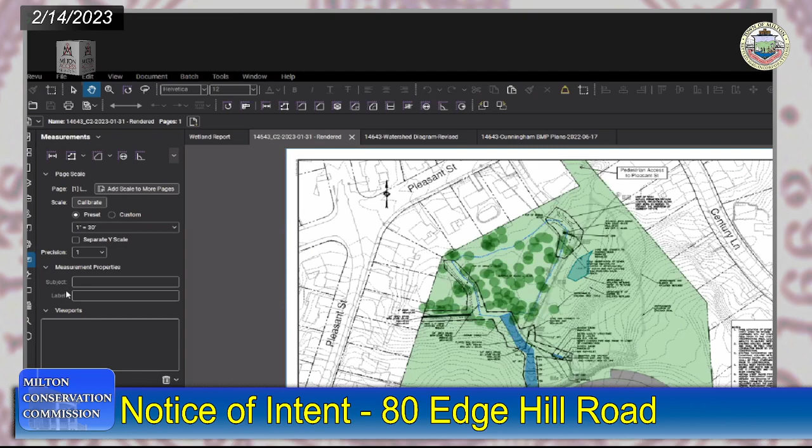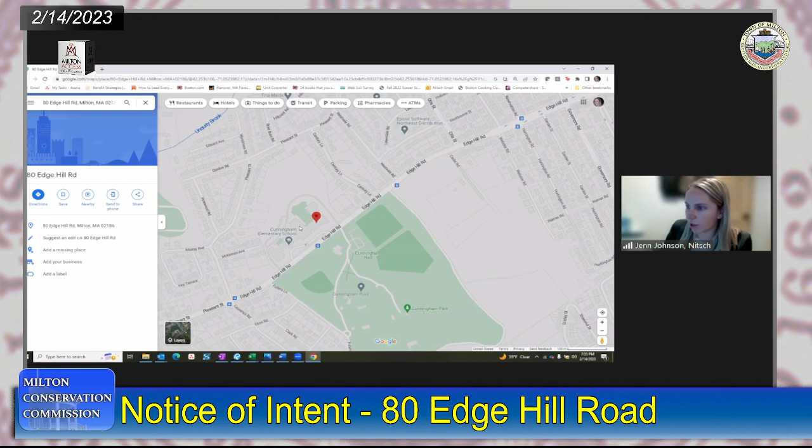All right, no problem. Let me get situated here. Are you able to see my screen? It is a rendered plan. Yeah, there it is. You're on. All right, great. Actually, maybe Marina was going to give the quick overview. I just want to provide you with a better locus map here, for those who haven't visited this part of town. Hi, Jenn. I'm here. I just want to let you know. All right, go ahead. Why don't you jump in and give the intro? I was just pulling up the aerial on screen, and then I'll take over when you're done.

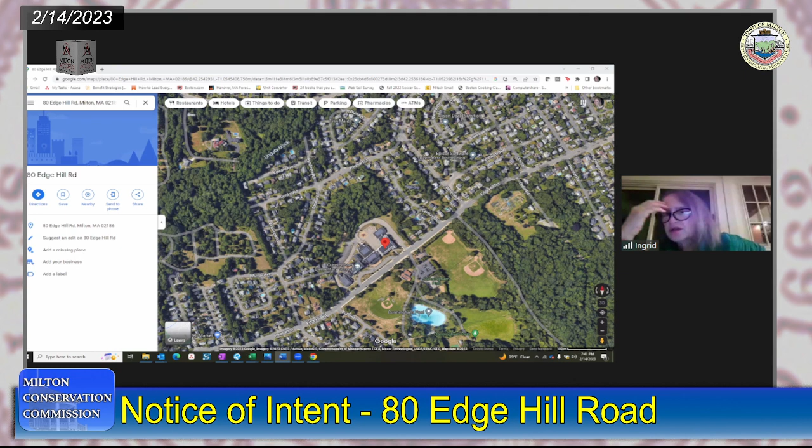Okay. Thank you. John, you and I were thinking along the exact same lines. I just scribbled down a question here in my notes: just solids, or bacteria as well? So you've answered the question regarding the solids, and you started to answer the question regarding bacteria. But I just want to take it one step further.

So there's E. coli, but any other organisms in terms of bacterial growth or contamination? For example, runoff due to fertilizers can cause blooms of other microorganisms as well. So I'm wondering if you can address that aspect of it. Sure. Do you mind if I jump into a little bit more detail about how it's designed, and then we can talk about those pollutant removal processes? Yep.

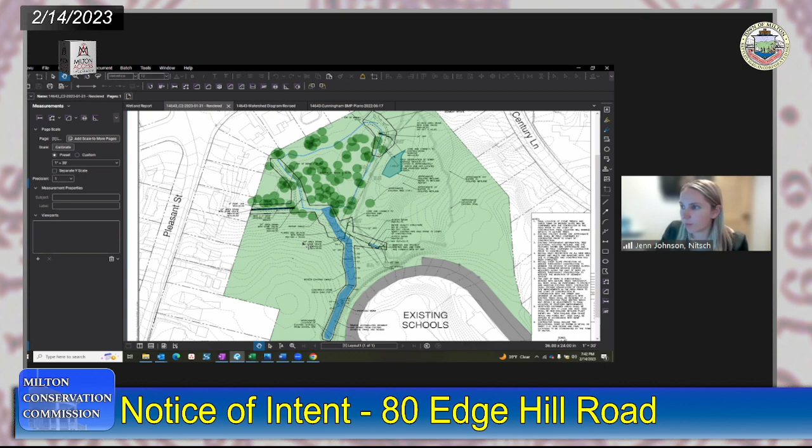So coming back from this image here, I'm going to show a plan that zooms into this wooded area where we're proposing the stormwater basin. And just to orient you here, we've got the school property and the driveway that wraps around the back, Pleasant Street up on the north side, and then Century Lane over here.

The primary intent of this project is to utilize this existing woodland depression. It's already a low point located, as Marina said, right alongside the sewer and drain pipes. So it provides easy access for us to divert the lower flows associated with that closed drainage system. So the plan right now, as shown here, is to create a diversion manhole along the existing system, send it to a water quality structure, which is going to be our first line of defense.

It'll remove trash and larger sediments, things like that, before we even divert into this lower swale here that is going to flow into the low point that will remain a woodland condition, but will be able to absorb stormwater runoff. Is that structure underground or is it above ground? That's right. The structure is below ground. And there's 2 access manholes at the surface that will be able to be cleaned out.

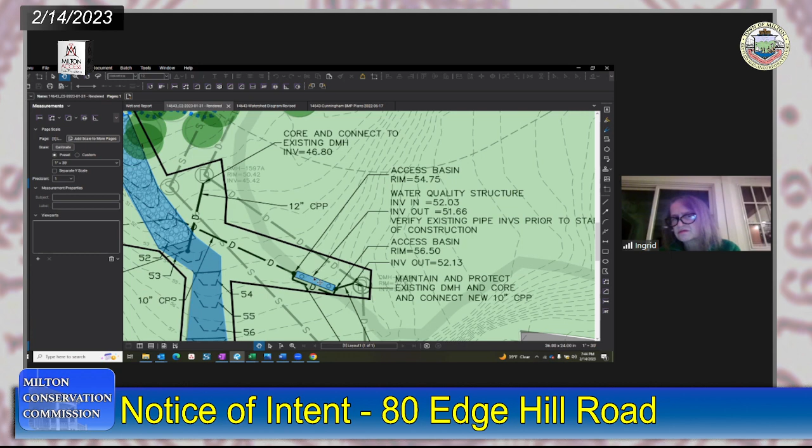So those are removal of gross contaminants, or whatever. Do you know what the size exclusion is of that step? The size of the sediment to be removed? Size exclusion. And what is the filtration like? It's not really intended to be a filtration system. I can even show you a detail of it if you really want. I love getting into the details. So I'm happy to show you.

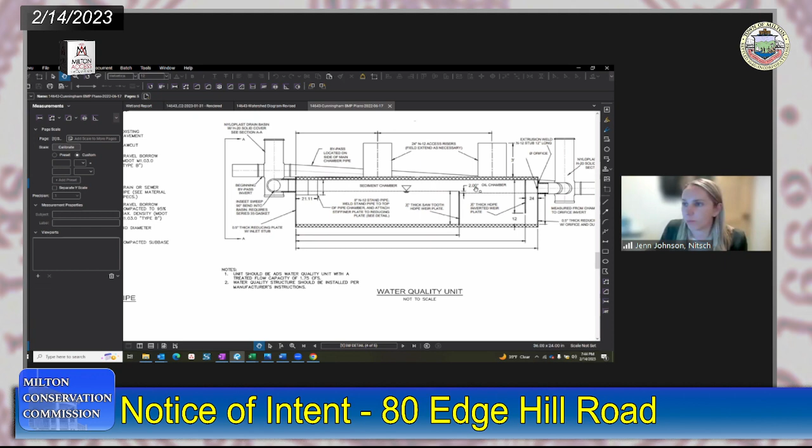It's kind of like a glorified sediment forebay, right? But we put it below grade because there are trails back there, so we thought it might be better to have this structure below grade. So it's really just a sedimentation chamber that also will allow oils to float to the top before you get to that second step of treatment. So it's not an actual size exclusion. It's just simply sedimentation. I got it. That's right. Not like a hydrodynamic separator.

Exactly. And so then water, which is primarily from the closed drainage system, is going to take this treatment train. It will go down through this riprap swale and down into the infiltration basin. And the way that this plan is set up is that the town did go through and take GPS shots of the points where trees are located, primarily within the limit of work. So there are trees obviously all over this green space. So I just wanted to point that out.

But we did want to try to design the earth moving that is required to minimize impact to trees as much as possible. So the way that this basin will be created is by constructing about a 2-foot berm located on either end that closes off that existing depression and allows water to pond within this woodland area. I'm sorry, within the what area? Within this woodland depression here. Okay. The soils actually are quite favorable within this low spot for infiltration. And so that will be the primary way that water is cleansed, is to be recharged back into groundwater.

And then overflow and larger storm events will be collected through a beehive grate, which is those large circular grates that have a nice trash rack on top. And then it will connect right back to the drainage system that runs along the pathway here. So when you say ponding, and I know a lot of the calculations were done with a 1/2 inch of water as the model, but I also saw that you went through 2, 25, 50, 100-year storms. Do you expect water to be in this area that you've surrounded in blue as standing water?

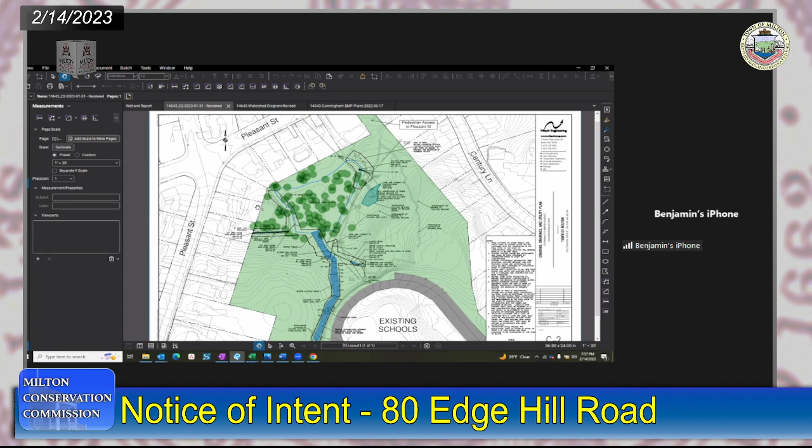And it's not covered by the berm that looks like it's proposed. It cuts off right where most of the flooding into the backyards actually occurs. Oh no, up a little bit further with your cursor. Yep. So that house right where you are, and then up off, exactly. And the one up off to the right will also experience some of the water during more extreme situations.

But do you agree, though, that the berm will help protect your property, as we're looking at to the right? So I've never spent any time off to the left, beyond where my property is. I'm sorry, not making sense. On the other side of the berm from where my property is. But anytime I've gone out in the back of the house after heavy rainfall, that whole area off to the right-hand side of the berm collects water, and that water is also moving into our backyard. So I don't think that berm is actually going to protect us much.

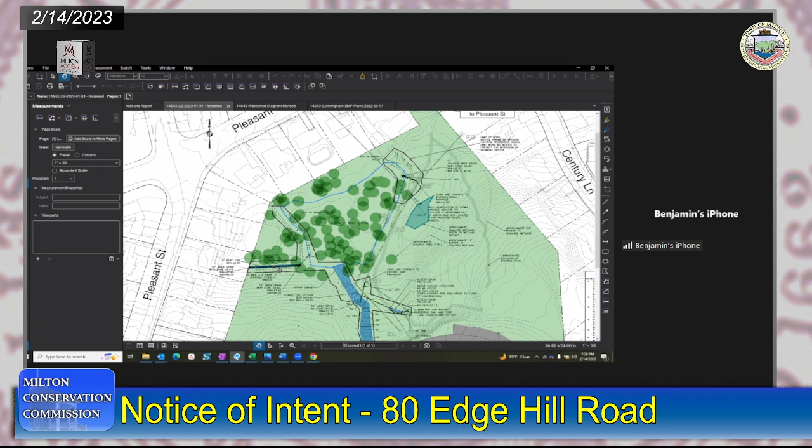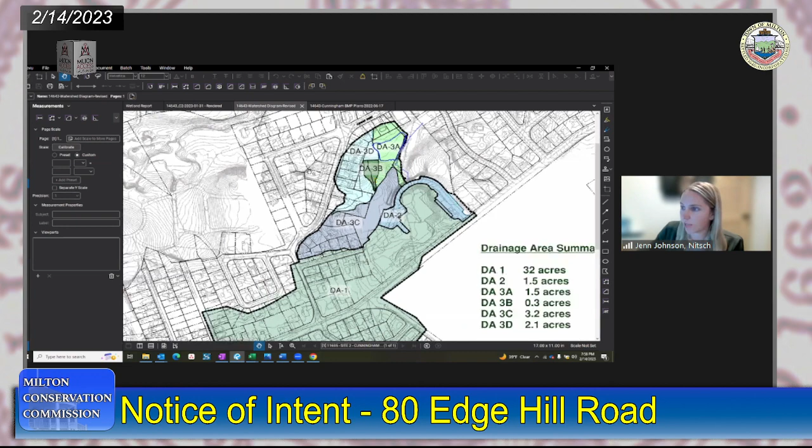Jen, do you agree with that, at least by design purposes? I'm not sure where that additional flow... I mean, all I can speak to is the location of the existing depression, which you can see here is this 45 contour, which is primarily located in that yard, as well as kind of extending a little bit further to the north. And the intent of this crushed stone trench is to disconnect the rest of that watershed so that it's not flowing down into that location. You can see that here.

It is true that there's additional water that may be generated by the rest of the watershed that might still get to his low point. But our intent was to disconnect as much as possible within the parcel that this project is proposed on. Yeah, what we had heard at the meeting with the homeowners was that this was a condition that got worse after the school built, I believe they call it like a park, back there where that highest point is. So that was our intent.

If that condition got worse when the park was built, we could build that berm and disconnect that area from flowing directly into these people's backyards and therefore use that water to go back into our basin. The part that you're talking about, is that the synthetic turf area? Yes.

And so now also the swale that runs behind the school and collects the drainage system from the school area will also be disconnected from that low point by the construction of this berm, because now that will be directed to the basin, which has another discharge point away from that existing low point. So you can see we've tried to isolate that from the rest of the system.

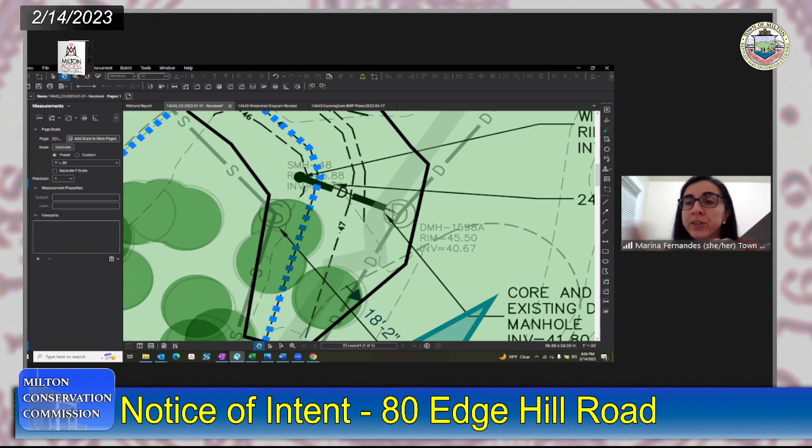So again, if you have a 100-year storm, our purpose is not to infiltrate a 100-year storm or a 50-year storm or 5-year storm, none of that. The idea is that first flush. You treat that first flush. Jen, if you can just maybe speak to that a bit more.

Sure. Yeah, it's the first half an inch of rainfall across the watershed that will be taken into the basin through the diversion structure. And as Marina mentioned, beyond that, it will continue to utilize the post drainage system. So it is a limited amount of water that would be directed here so that it does not have a major impact on the hydrology of the overall area.

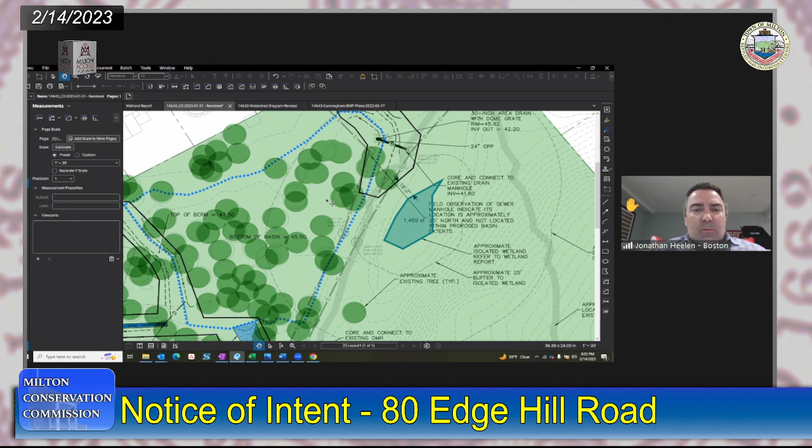So to answer your question, I think what you're asking about, we call it in engineering groundwater mounding, right? Will there be any impact to groundwater from this project? And the answer is that we do not expect that to occur because it is a low dose of water being added.

But there's obviously digging and moving earth around when they do it, and it's kind of like anything can happen. Not anticipating it to happen or not expecting it, or it shouldn't, I just wonder if now's the time to ask, what if it does happen? What do me and some of the other neighbors do if something got disrupted and it flows a different way? Since they're doing it, is there a way to head that off at the pass and mitigate any problems for the houses?

I think that's a very fair question. So to that point, this is the engineering department doing this project, so we're not a developer that is going to go away. We're still going to be in town and dealing with this project. Jen will have oversight during construction, so this is not going to be a contractor that will go out there and just arbitrarily make mounds. We'll have engineer oversight during construction, and we have a whole full bid package. They need to comply with those requirements in the bid package, otherwise they do not get payment.

So if the elevation is off during construction, we will be able to remedy it right away, at no cost to you, no cost to the town, for them to make what is in the planning document. Now, if there are any issues with the amount of water you're getting after, let's say, a year, you have a high spring. It's really difficult to compare one year with another, but if you're seeing a lot more water, you certainly need to get a hold of our department, and we'll work with you to see what other ways we can get that water out of your basement. Does that make sense?

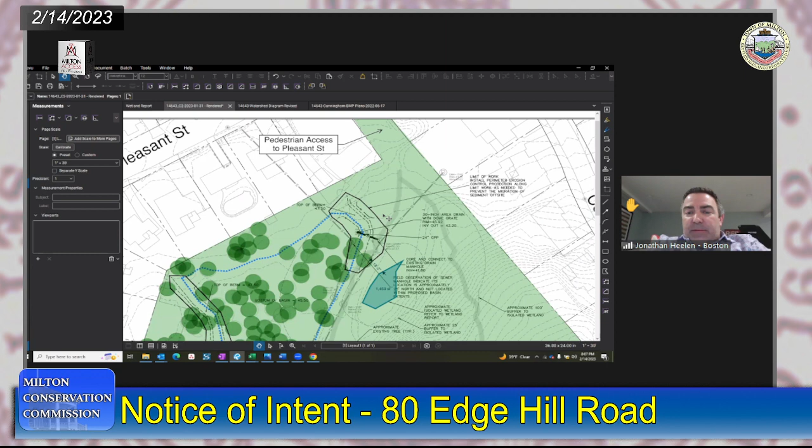Yes. It's kind of wait and see, and maybe something could happen, and maybe nothing would happen. I guess I was posing the question, if there was a way to mitigate it while engineers and workers are back there thinking about this stuff. To me, the time to potentially do it would be up front. I just feel like it would save work and time and money ultimately.

And it has been up front. There's been a whole year of design with Jen and Jen's group and hydraulic modeling. So we're not eyeballing this. This has been thoroughly thought through, and this is a project that has passed all the QA/QC checks, both internally to our department as well as the engineering department.

Jonathan, the only other thing I can mention is that the way this watershed divide lines up, the project is located kind of outside of the watershed that's impacting this row of homes. These are the contours here that you can see. And this water along this side on these residential homes is pushing towards it. So this project here is located outside of that direct impact. So it's a little bit different than what happened over here, right? Where this was an existing low point.

So I think... Jen, do you have the map? Because I recall seeing that watershed map in your package. I do have a watershed map. That might give a good visual display of what you just said.

Sure, thanks. So here's the homes along your street and Pleasant Street to the north here. So the watersheds that are being directed to this project location, which is the blue line here, are these green boundaries. So you can see this is the other piece of woodland that's a little bit closer to that road, which is outside of the influence of this project. So that's how we designed it, right? It's based on this contributing drainage area.

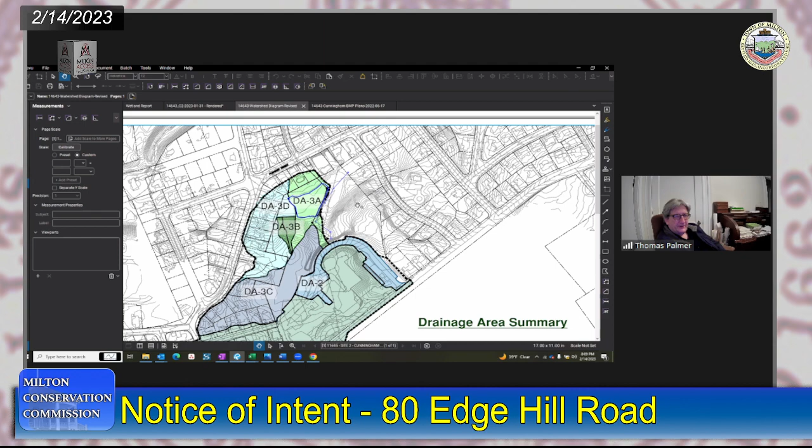Could we go back to the other picture? I want to point something out. The closer in plan. Do you see the wetland that's drawn in there with the little blue polygon? Remember, we were talking about the soils, how deep and sandy they are, and the annual high water mark of the groundwater was more than 5 feet down. When I was there and looking at that wetland, I said to myself, I don't know if I would map this as a wetland because I really can't find any wetland indicators, although there were a couple of wetland plants.

But notice where it's placed in relation to all the contours. It's right at the bottom of the closest approximation of contours. In other words, it's right at the bottom of the steepest area. And this house lot we're talking about has the same relation to those contours, doesn't it? Mr. Heelen's house is at the bottom of a steep slope. Isn't that so? Is this your house up here? Yeah, where the slope, you can see the contours are close together just uphill, and then they flatten out, and there are few of them.

That's also true of where the wetland is, and it's also true of where the swale comes off the slope on the existing stormwater. So it's just a place where you have a built-in likelihood of water getting closer to the surface than in most of these very porous areas, because you're at a place where a slope ends. And just because water moves downhill, as it comes off the slope at the bottom, it tends to approach the surface a little more. That's all I'm saying.

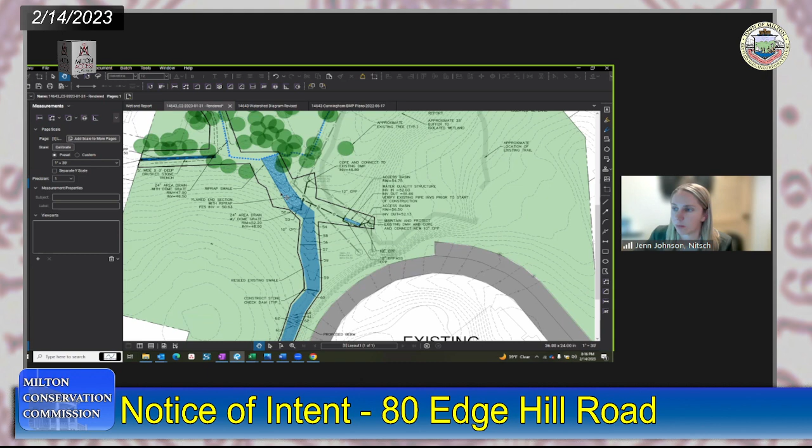And so that swale will also promote additional pollutant removal and absorption into the ground before you even get down to the bottom of the hill where the depression is going to be. I just wanted to point that out for you. Understood.

I'm not sure it's an answerable question, but to the extent that the project is designed to improve the water quality in Unquity Brook and eventually into the Neponset River, is there any kind of measure as to the efficiency of this plan once it's implemented? I know you can measure the solids removed, and eventually you can see what's happening in the Neponset River, but is there any way to measure the efficacy of this particular plan?

That's an interesting question, actually. Are you asking about if monitoring might occur with water coming in versus out? Yes, right. What's going out now, and what's going to go out after this is over? I'm not sure where you'd even capture it from. It might be somewhere Unquity Brook first daylights. I'm not sure where you'd measure from. Marina, why don't you take it?

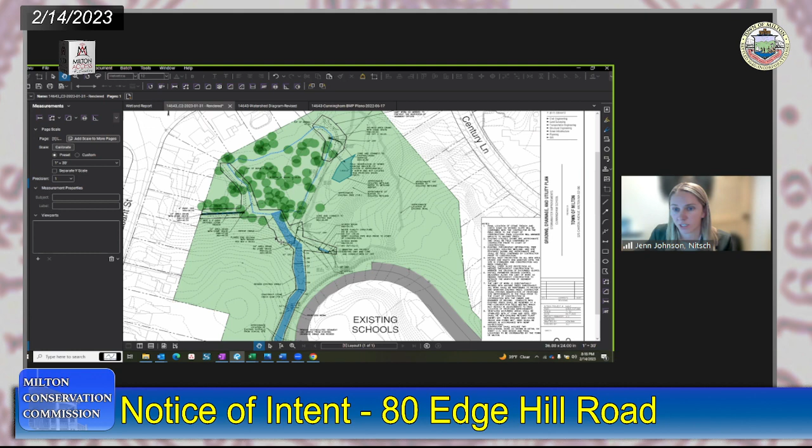Because I know we've talked about that a lot, about the potential for this project to really serve as a public education tool and could also be worked into the school curriculum. But I'm not sure where that stands, so I'm going to let Marina take that. Yeah. So, John, it's difficult for us to be monitoring the life of the project and capturing those actual TSS removals.

But we are hoping that this will become part of the school curriculum. Currently fifth grade science has stormwater management in the curriculum. So we are envisioning that this may be a site, since Neponset Watershed Association currently goes to this school and helps with the fifth grade science.

So we are hoping that, very much like other projects like this in neighboring communities, the children can come down and access the site. If any monitoring happens, John, it'll be part of a study, maybe through research, R&D, but there are no requirements or plans to actually monitor the actual TSS removed.

Well, how is the site selected in the first place? Well, I was actually mentioning that in the beginning of this presentation. The Neponset River Watershed Association did the study, figured out that Unquity Brook has a stormwater runoff issue. And then they followed up with the town of Milton with a study to select town-owned properties that could have its biggest bang for a buck, right?

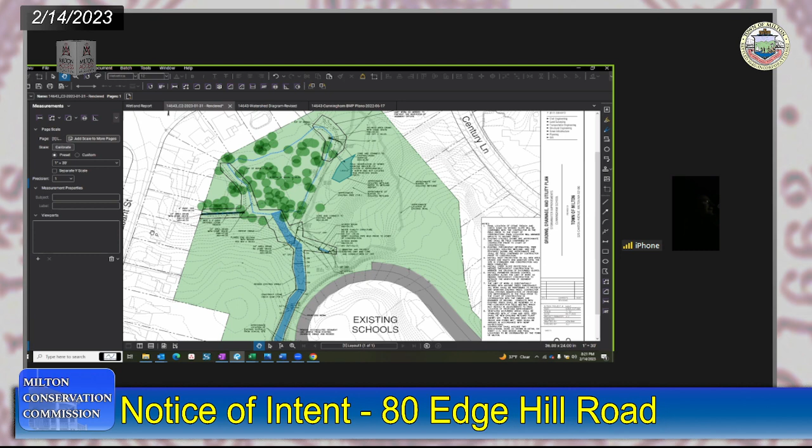No, you are. And I know that they could easily say that, well, each year the Neponset River is tested for, as I said in the beginning, E. coli, phosphorus, and nitrogen, and they get a grade. And Unquity Brook flunked, or was a C- or something. It was pretty bad. And so Unquity Brook needs to be cleaned. And this was one of several sites that were talked about. One was at Algerine Corner to pick up the pollutants coming off of Adams Street. This was a backup site to that plan.

So I'm just wondering whether or not it was selected because there was an identifiable source for contamination or pollution. And if so, then is there any way to measure, is it coming out of the water at that point? It may have to wait until 10 years from now, and the Neponset River changes gradually. And it has, by the way. It's gotten much better over the last 20 years.

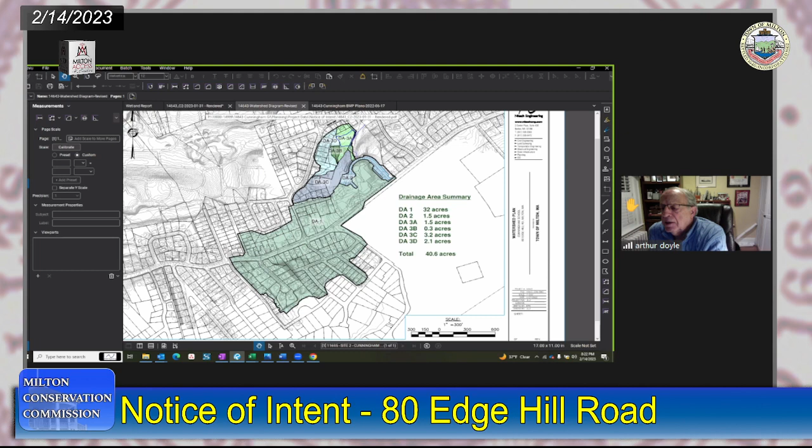John, this is Arthur, if I may. Part of the outcome will be whether or not there's a water quality improvement in Unquity Brook. My recollection is that the last report card from NepRWA gave Unquity Brook a grade of F, which is one of only a handful of waterways in the entire Neponset watershed area designated with the lowest grade possible. So with that type of a benchmark, after this work is completed, there would be ongoing monitoring of the water quality in Unquity Brook. Yeah, I agree. Well stated.

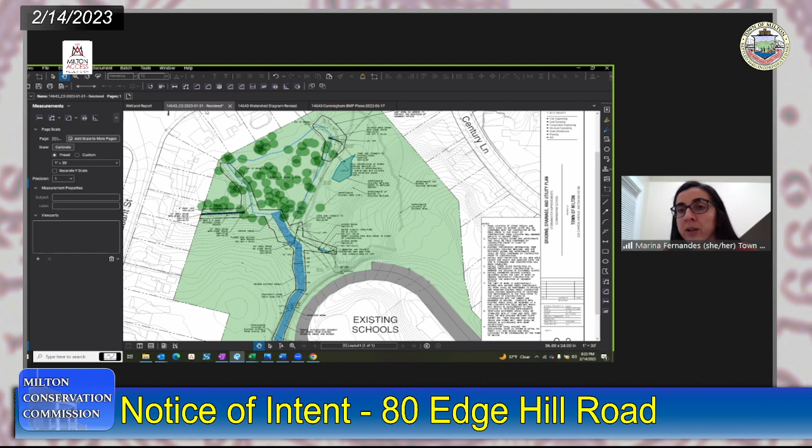Yeah, and not only that, this project has received funding from a 319 grant, which is a state grant, for that same reason. They understand the potential positive impacts to Unquity Brook this project can have as an outcome. It's a very difficult grant to receive. And we, as the town of Milton, have been very fortunate to receive this grant for this construction.

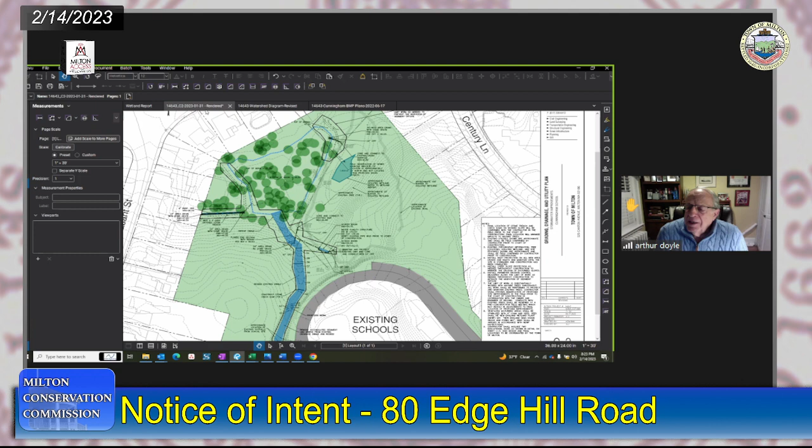Mr. Chairman, if I may add, I know this topography very well. I spent years going way back as a student at Collicot and Cunningham before the new construction. I'm aware and familiar with the changes that have taken place in the area since the new schools were built. I know the pathways in there. I know Century Lane, Pleasant Street, and so on down the line.

We have to remember that this is at the crest of a hill coming up Pleasant into Edge Hill Road. So you have an extreme amount of water flow that's coming off that entire area into Unquity Brook ultimately. So this would be a major mitigation improvement with respect to the water flow that's coming off the roadways, parking lots, et cetera, in that particular area. By that, I mean the larger neighborhood.

Yep, that's represented here. You can see the 32-acre drainage system that's being diverted through the piped system. And then the lighter blue areas are areas that are being captured over land. So we've got about 32 acres here of this upland neighborhood that will be treated now that are not currently treated beyond a catch basin. So it's a very significant area that's going to be treated. 40 acres.

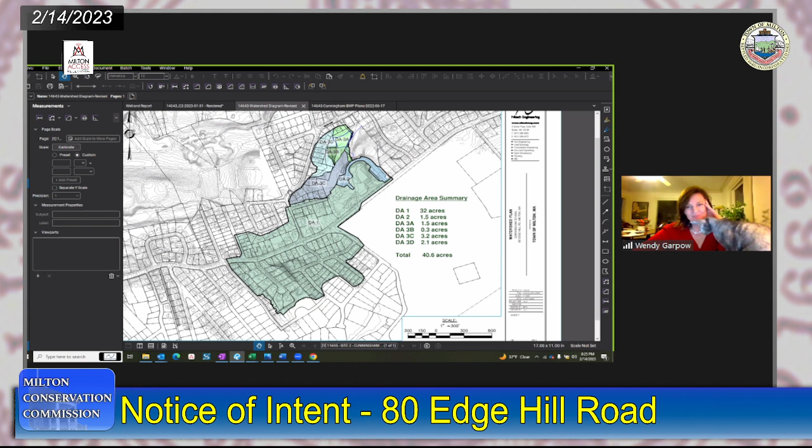Sounds like a good plan. Any questions from commissioners? I don't mean to speak so quickly, but it may be appropriate to do a site walk. We could do it quickly, so it's not a question of slowing down the process. I would like to site walk. I've certainly been there in the past, but I think it might be beneficial to the commission and to the public if we had a public meeting on site. Does anybody else think that's appropriate?

Yep, agree. All right, we can move quickly, and Marina, we won't slow down the process at all by this, because we could actually do it this Saturday. As long as we get the public notice out, we need 48 hours. We'd have to notice it tomorrow, which we can do. We could do it this Saturday or the next Saturday. I think this Saturday is the 18th. The following Saturday is the 25th. Is there a consensus that the site walk is appropriate? We should do it. We always do one. No, just looking for a consensus, Tom.

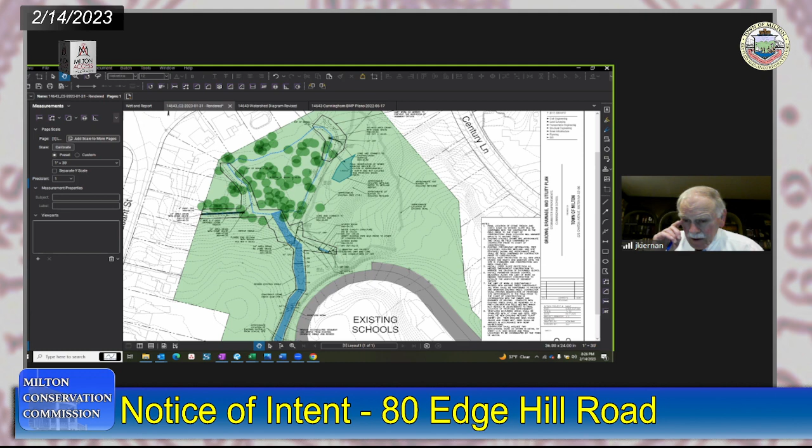John, this is Hans. I'm not available this Saturday. I would like to do the site walk though. Can you do the 25th? I believe so, yes. That's great. I can do the 25th, Ingrid. Yeah, I'm just looking at my calendar right now. Yes, I can do the 25th. Okay, Arthur? I'm not available that day, unfortunately. I'm available the 18th, but I could site walk it again. We've been up there in the past, Mr. Chairman, if I remember correctly. We have been there the past several years, and I could go and do an independent site walk. I'd be happy to do that.

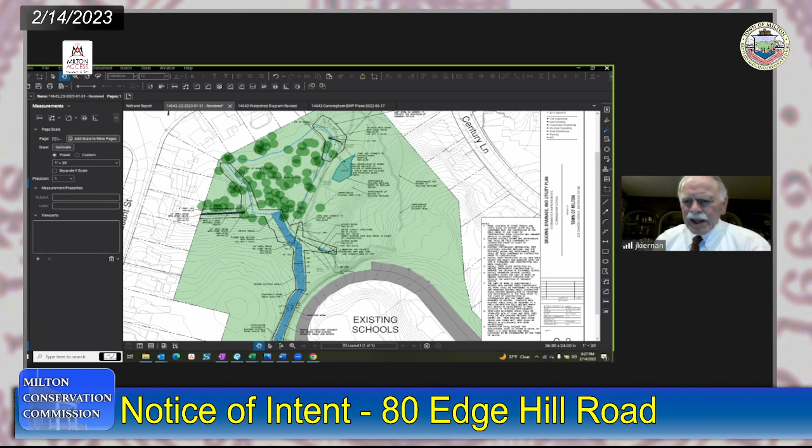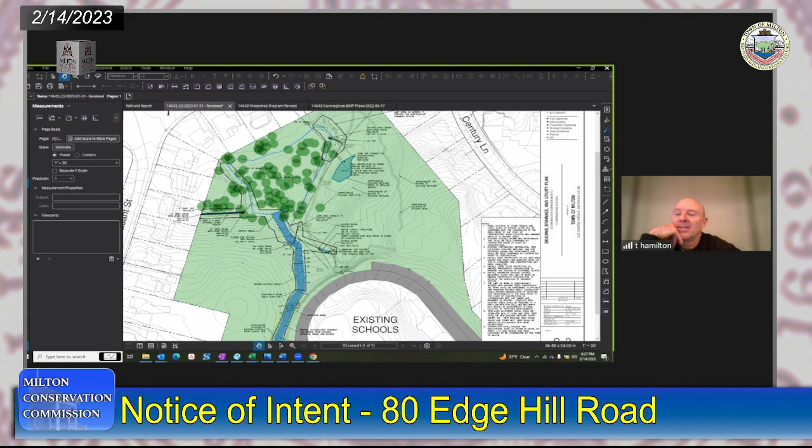All right. So we've got 3 for the 25th. I could do the 18th as well, this Saturday. Right, but Hans cannot, and I know that Arthur is well familiar with it. He used to walk those paths, I think, back in the day. Tom, are you around? On which day? Well, either day, but it looks like to accommodate Hans. Arthur's familiar with it. Could you do the 25th? Yeah, I can do it. I don't think of any problems right now. All right, Wendy? Unfortunately, due to February vacation, I'll be out of town the next 2 weekends. I'm sad to miss the site walk, but I trust my colleagues.

All right, so now I'm counting people here. So we've got Hans for the 25th, Arthur for the 18th. I can do either one. Ingrid, you can do the 25th. I can do either one, yeah. Tom? Either one, I think. Tom, do you have to recuse yourself for this? What do you think? I was asked to provide some information, but I don't think any decision would have a financial impact on me. I'm not the attorney. Well, there's certainly no financial interest in it, so that takes care of the big conflict issue.

But my only concern was the survival rate of the trees in the standing water. I think your expertise is important in that area, although I don't think you think much of Norway maples, and that's what's there. I like them. I hope you're not going to sacrifice my Norway maples. They are an upland tree. Okay, I got you. And yes, there will be water, that first half inch, that they're not getting now. But it's my observation that occasional wetting is not a problem for most trees. In fact, when you're trying to plant a tree, you have to do it. At any rate, I could be wrong. It's my estimate that they won't be harmed.

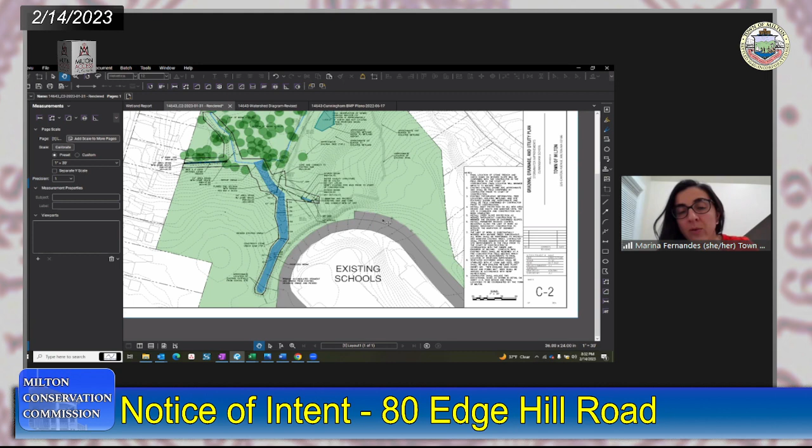All right, 8:30 on Saturday, the 25th. We will meet, where shall we meet? Is it rain or shine? Rain or shine, yes. Or snow. We'll meet at Cunningham, on the back, coming in off of the Pleasant Street side, in back of the school? Yes, there is a parking lot and you can all park your vehicles over here and then we can walk down Mary Trail. I believe it's named after a teacher. So we can walk there.

So is that off of Edge Hill? Is that the main? Off of 80 Edge Hill, correct. Oh, okay. Well, I think you come in off of, you're going on that side? Jen, do you have that video I showed you? That's a really nice video so they can see where we're gonna meet. I couldn't find the video on the web. Was it on the website? It was on the PowerPoint that I sent you. Oh, I only got the link to the website, so I'm sorry.

I have it. I thought the direct access to the parking lot was off of Pleasant Street. No, move the cursor to the left. There's 2 access points. I think Marina is pointing out parking back here behind the school where the swale is, and there's a trailhead right here we can drop down in. Okay. And there is also access off Pleasant, but there's more parking up here by the school. John, the last time we did a site walk, we parked exactly where the cursor was pointing in that driveway and along the woodland. Okay. All right.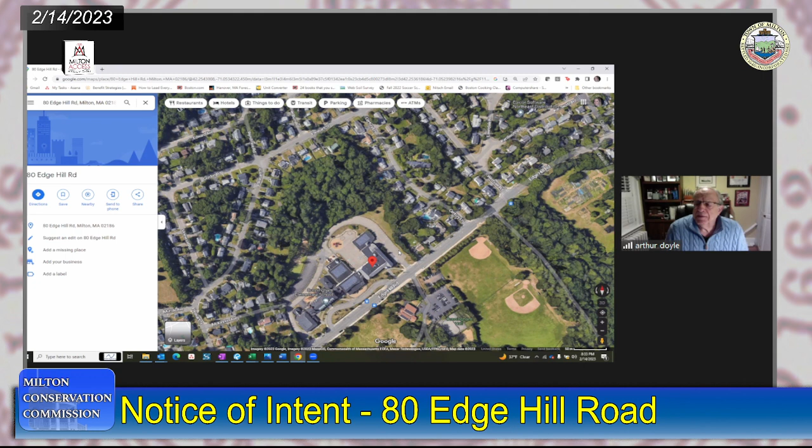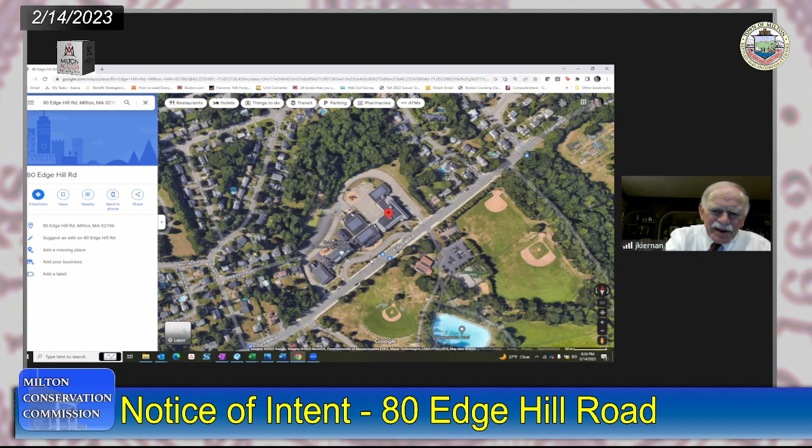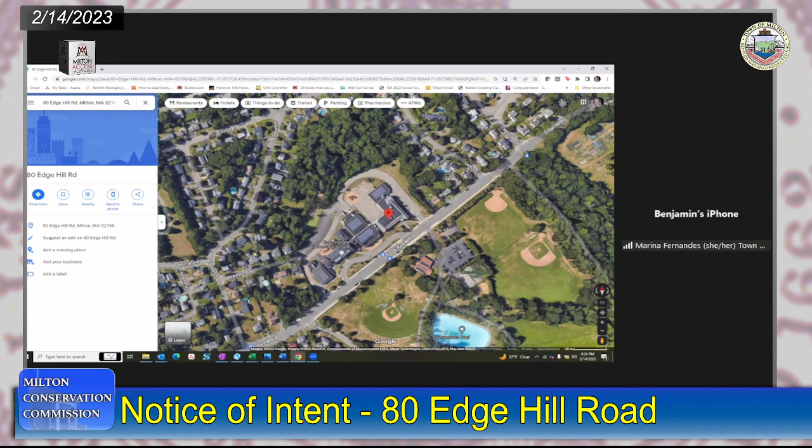I always just went in off of Pleasant Street. What's the name of that street there? McKinnon Ave? Yes, to the left. And it goes right back to Cunningham, off of Pleasant. Oh, here, McKinnon. Yeah, it goes right to where those spaces are. But no, we'll meet where you indicated, Marina. So we'll go in next to Collicot. Yeah, it could be slippery, so wear safe shoes. Okay. All right. That's perfect. Thanks for the advice.

Wonderful. Thank you very much for your time and attention. And we'll see you on Saturday morning at 8:30 on the 25th. Sounds good. Thank you very much. I appreciate all of your time and excellent questions. Thanks, everyone. Thank you, Marina.

Thank you, Jen. Bye. Okay, next on the agenda is a request for determination of applicability at 76 Forbes Road. Marion, are you presenting with us? And I know Ms. Dunn is here as well. And Ellen Dunn is here with me. Oh, great. So I'll go ahead if you'd like. That'd be great. Thank you.

This application is basically about a tree having been removed without prior consultation with the commission. I've provided a WPA Form 1 request for determination of applicability. We provided a plan, which is actually a site plan from the Milton Hill Development Subdivision, but it's a very detailed site plan that has wetlands lines. And I've marked with an X on the plan where the tree is. It's along Milton Hill Road, at the intersection of the Dunn property and the property to the right, and the Milton Hill subdivision, on the Dunn property side of Milton Hill Road.